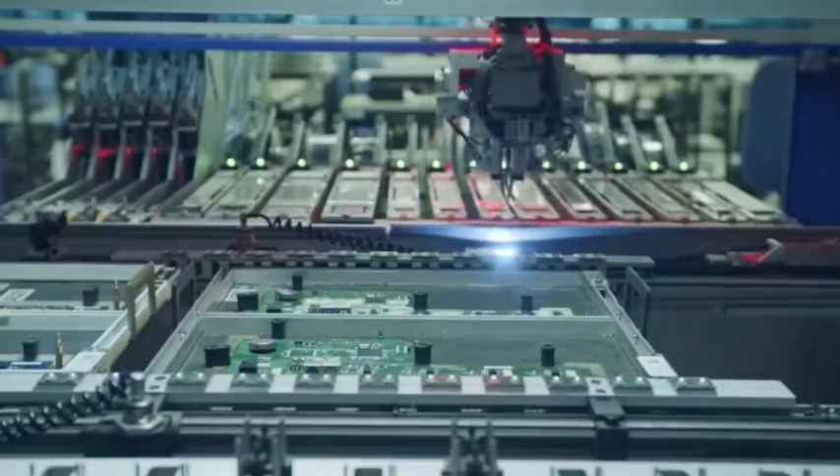In 2024, the global photolithography material market grew against the trend to $4.74 billion, and the demand for EUV photoresist soared by 30%, directly driving the entire market to $5.06 billion in 2025.

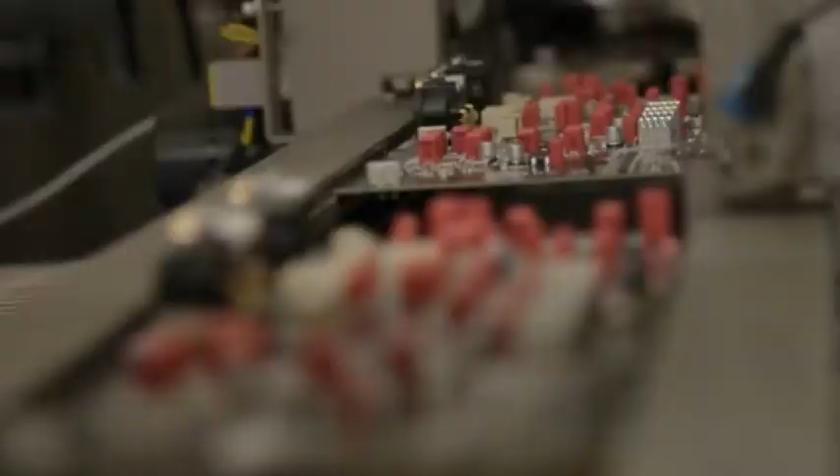TSMC's 3nm chip contains 19 layers of EUV photoresist, and Samsung's 2nm factory burns golden consumables worth millions of dollars every day. The electricity bill of an EUV lithography machine is enough for a small town for a year, but Canon's newly launched Nanoimprint equipment consumes only 1/10 of its energy.

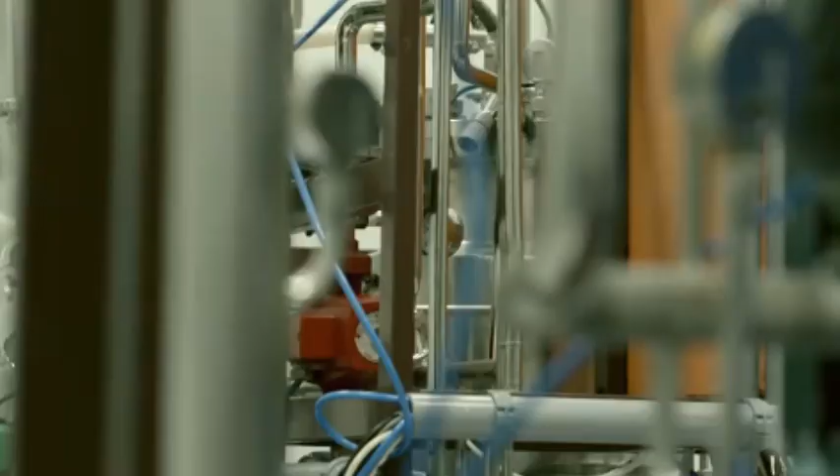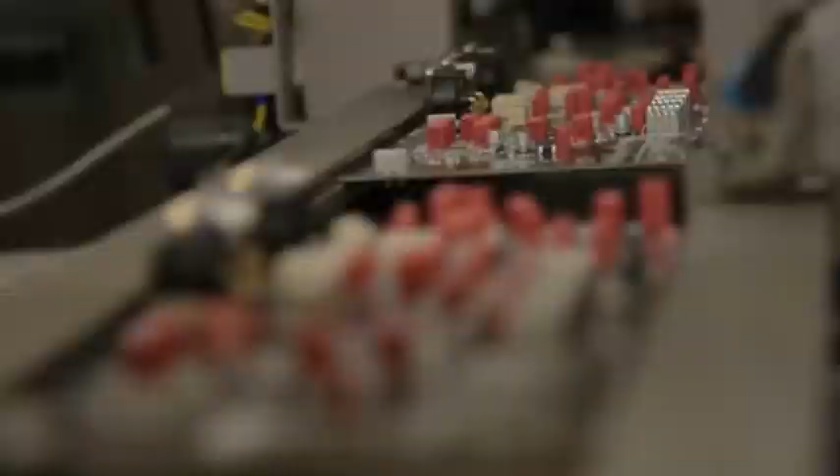In the photolithography material market's $4.74 billion in revenue in 2024, EUV photoresist contributed $520 million, 20% more than in 2023. By 2025, this number will increase by another 30%. In TSMC's 3nm production line, each wafer undergoes 19 EUV lithography steps, nearly 4 times more than the 7nm era. Samsung's 2nm factory is even more exaggerated, and the number of EUV lithography layers is expected to exceed 25.

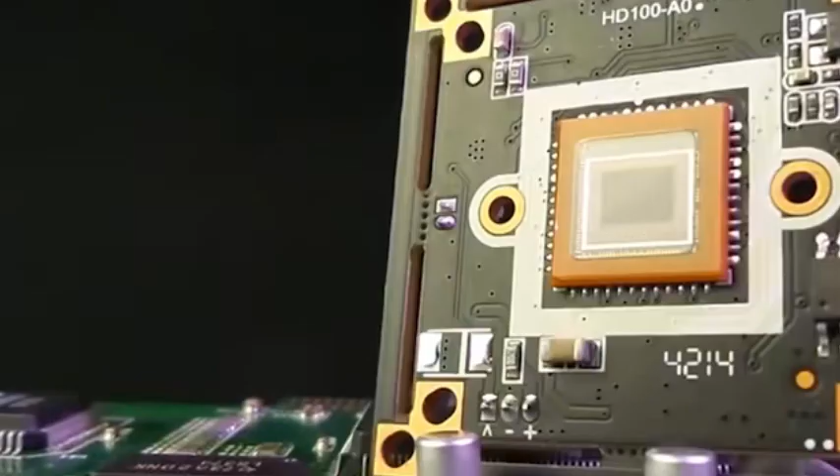Japan's JSR company monopolizes 45% of the global EUV photoresist market. There are more than 50 nano-level additive formulas hidden in their laboratory. It takes 10 years to develop a new formula.

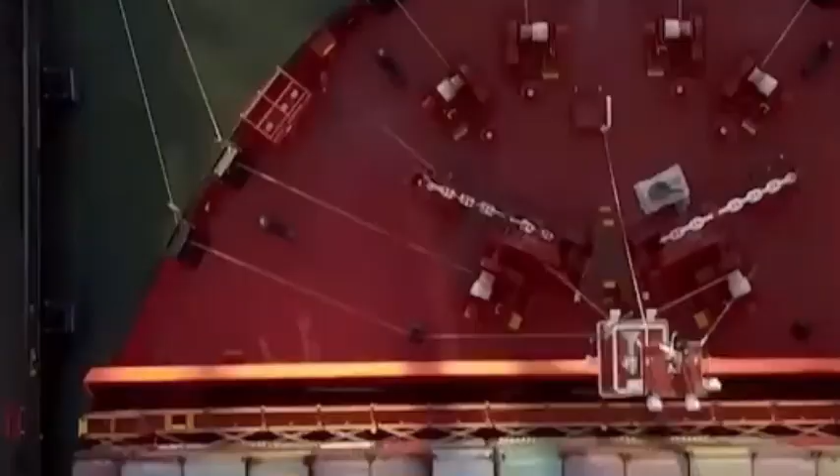Lam Research's dry photoresist has just passed the certification of the Belgian Microelectronics Research Center and can carve 28 billion transistors on a chip the size of a fingernail. This technology uses gas instead of liquid to reduce the photoresist defect rate from 200 parts per million to 80 parts per million.

Canon's Nanoimprint equipment occupies only 1/3 of the space of the EUV lithography machine, and the power consumption is reduced by 90%, but the precision of the 14nm circuits carved out is not inferior to EUV.

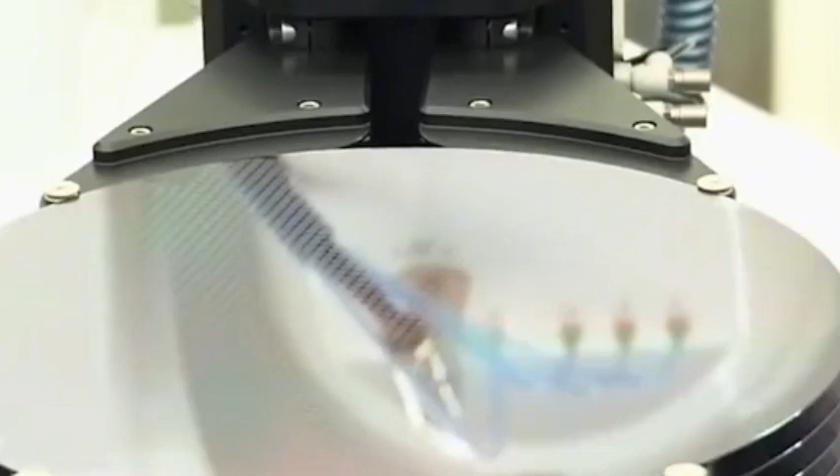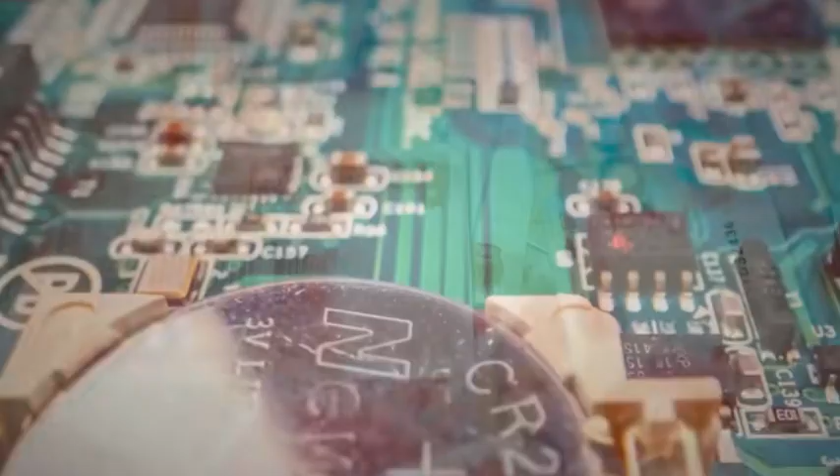The U.S. CHIPS Act has invested $52 billion, requiring local chip factories to use more than 30% US-made photoresists. Japan's JSR urgently built a new factory in South Korea to increase EUV photoresist production capacity by 50%.

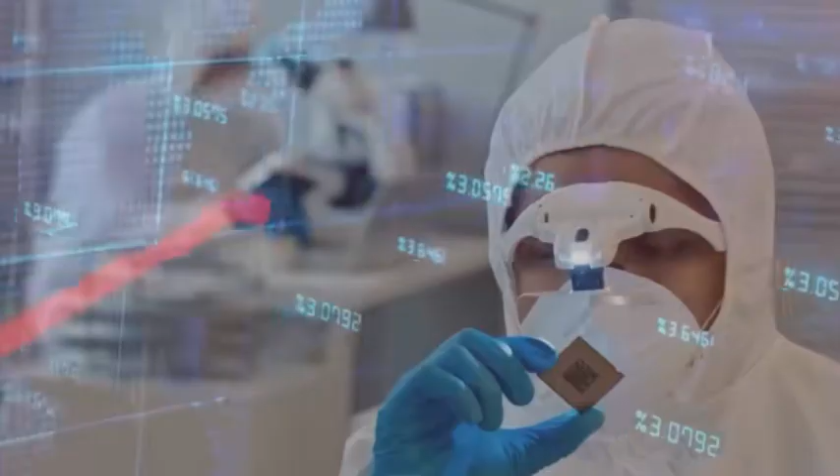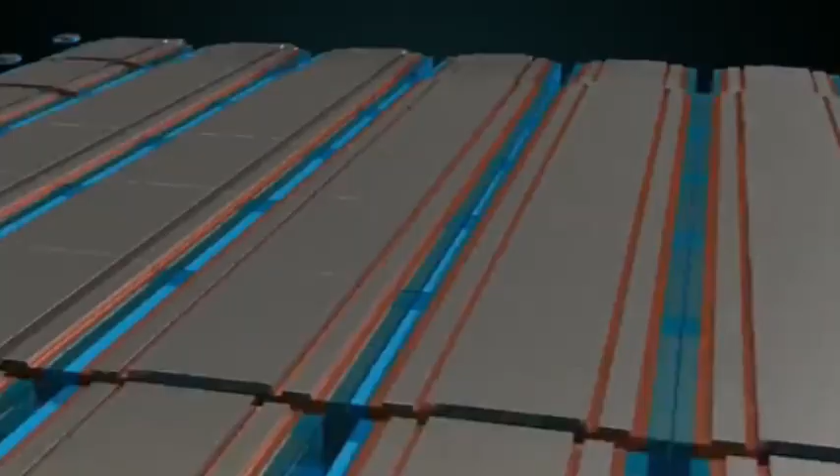China's Nanjing Optoelectronics KrF photoresist has just passed SMIC's verification and will sell 400 tons in 2023, but the price per ton is 15% lower than that of Japanese products. On SMIC's production line, the yield rate of domestic KrF photoresist has reached 98%, but EUV photoresist is still in the laboratory stage. An engineer from a domestic photoresist company revealed that the EUV samples they made can barely be used at the 28nm node, but at 14nm, the pattern loss rate is 20% higher than that of Japanese products.

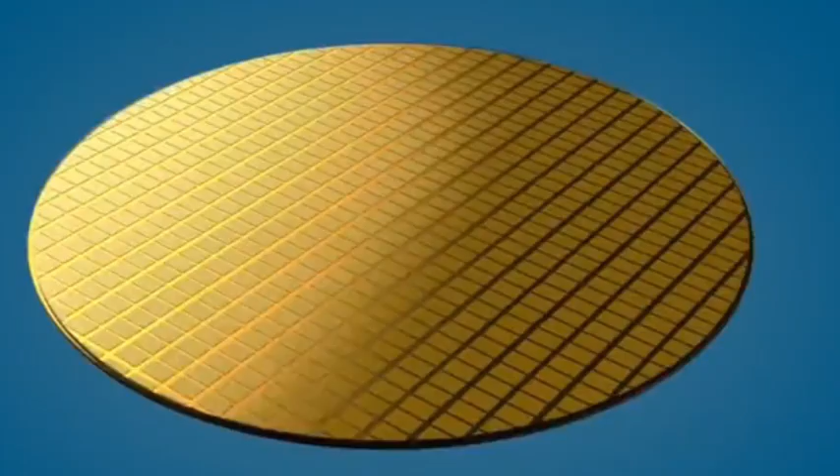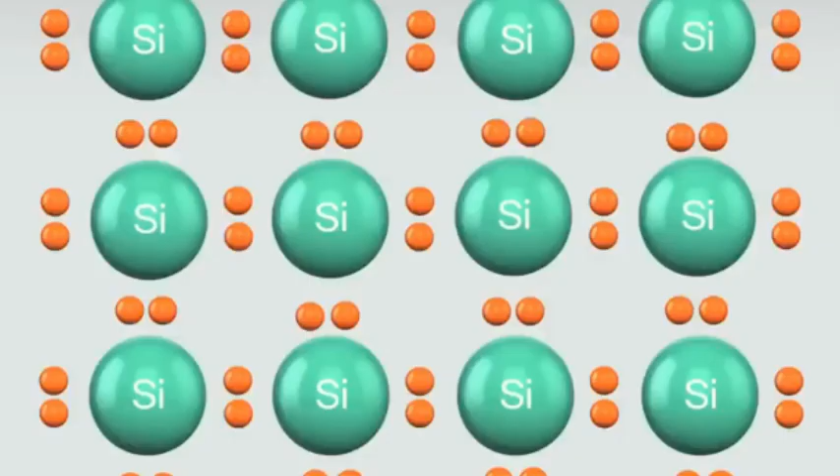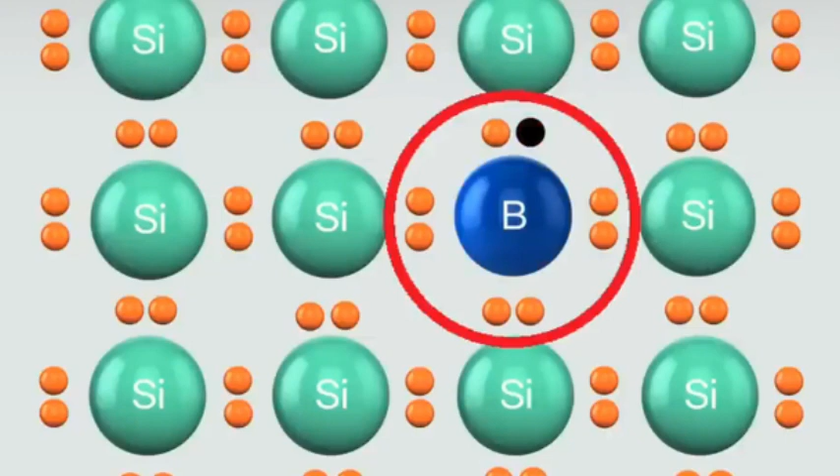TSMC's CoWoS packaging technology used in NVIDIA's H100 GPU requires photoresist to achieve 99.999% pattern integrity at a 2-micron spacing. This is equivalent to drawing a full circuit on A4 paper with a brush, and not a single stroke can be wrong. In order to meet the standard, photoresist companies upgraded their testing equipment to 0.1 nanometer accuracy, which is 100 times smaller than the new coronavirus.

IBM used AI algorithms to cut 70% of the time for photoresist research and development. In the past, it took 5,000 attempts to adjust a formula, but now the machine learning model can lock the best combination after running for 3 days. The EUV lithography machine of ASML in the Netherlands consumes 3,000 liters of ultra-pure water every day, but Canon's nano-imprinting equipment does not even need a water cooling system.

In 2023, TSMC purchased 18 high-NA EUV lithography machines, and the price of each machine rose to $380 million, enough to buy 12 Airbus A320 aircraft. According to the financial report of Japan's Shin-Etsu Chemical, the gross profit margin of photoresist will reach 58% in 2023, which is more profitable than selling iPhone chips.

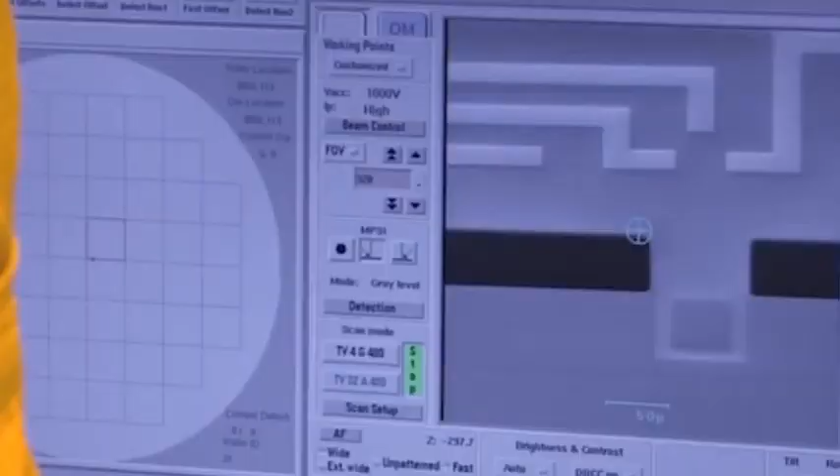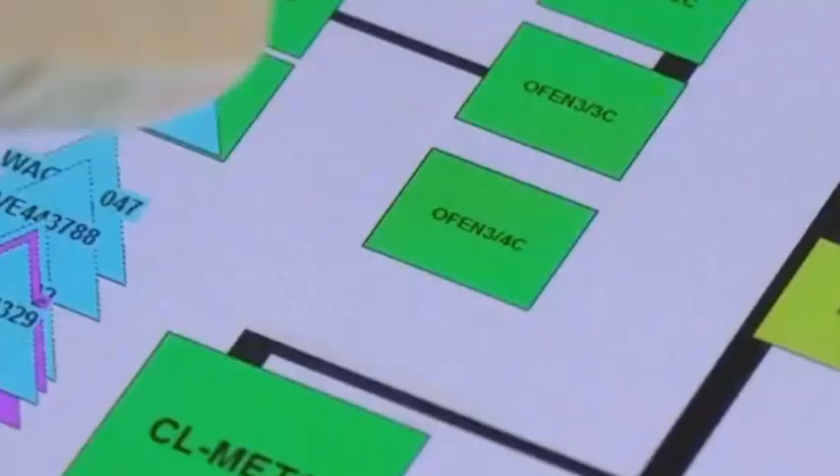However, in the financial reports of Chinese companies, the photoresist business is generally in the red. Shanghai Xinyang's photoresist revenue in 2023 was $230 million, but R&D investment burned $310 million. The mask cost of TSMC's 3 nanometer chip exceeded $20 million, of which photoresist accounted for 35%. If Japanese EUV photoresist is used, the cost of each wafer will increase by $200, but if a substitute is used, a 1% drop in yield will result in an additional loss of $500.

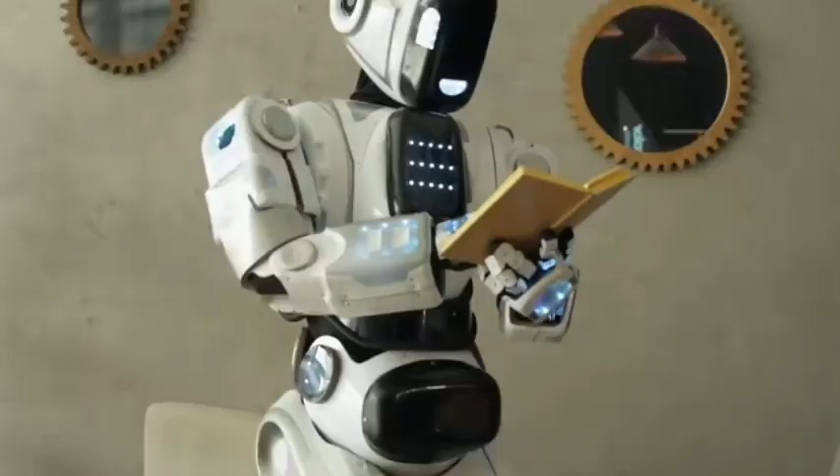In the global photoresist patent library, Japanese companies account for 73% of EUV-related patents. China's EUV patent applications in 2023 have soared by 80%, but 90% are concentrated in the packaging field. Despite significant progress, China's semiconductor industry still faces multiple challenges.

In the field of key equipment such as EUV lithography machines, the situation of more than 90% dependence on imports has not changed fundamentally. The 0.55 numerical aperture technology of ASML's latest high-NA EUV lithography machine pushes the process to below 2 nanometers, which is still an area where domestic equipment urgently needs to break through.

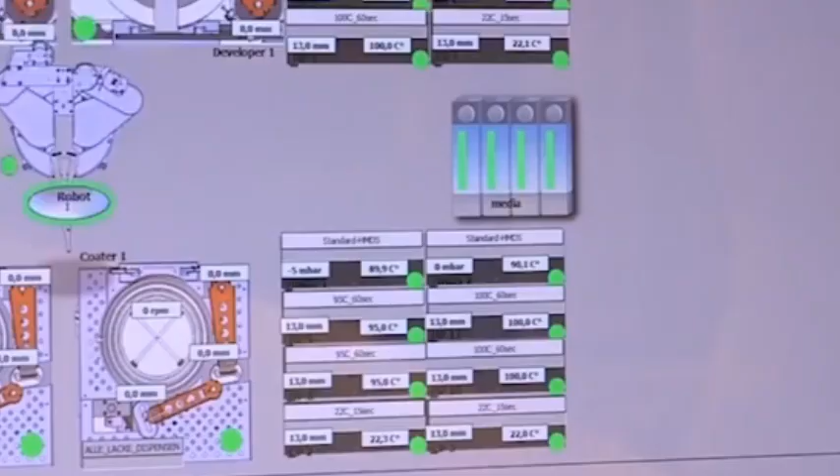The bottleneck on the material side is also prominent. The localization rate of 12-inch silicon wafers is only 10%, and the category coverage rate of photoresists is less than 40%. These invisible shortcomings restrict the overall upgrading of the industry. But there is a turning point in the crisis. The US technology blockade unexpectedly gave birth to an innovative ecology with Chinese characteristics.

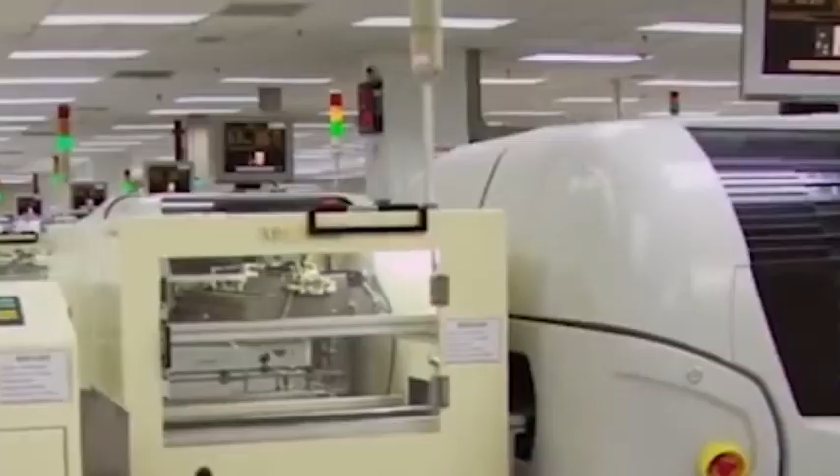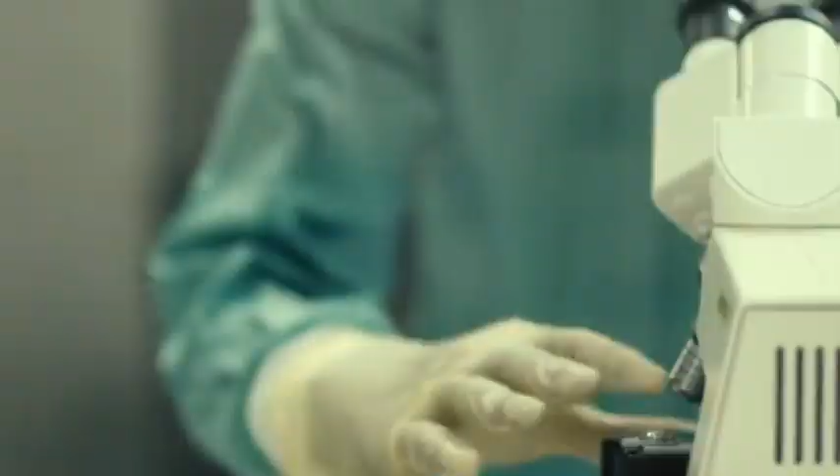Huawei's Tashan plan has gathered more than 2,000 supply chain companies to build a complete replacement system from EDA tools to packaging and testing. The chiplet technology developed by the Institute of Microelectronics of the Chinese Academy of Sciences modularizes chips of different process nodes through heterogeneous integration, and achieves equivalent 5 nanometer performance on a 14 nanometer platform. This system-level innovation is rewriting the rules of the game.

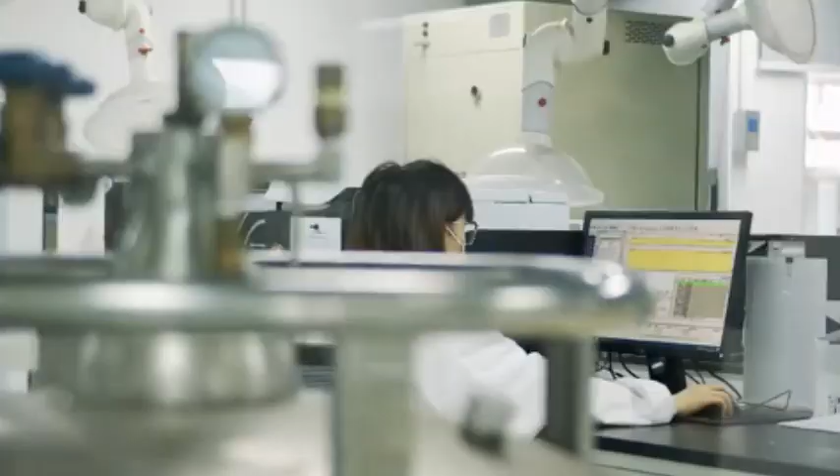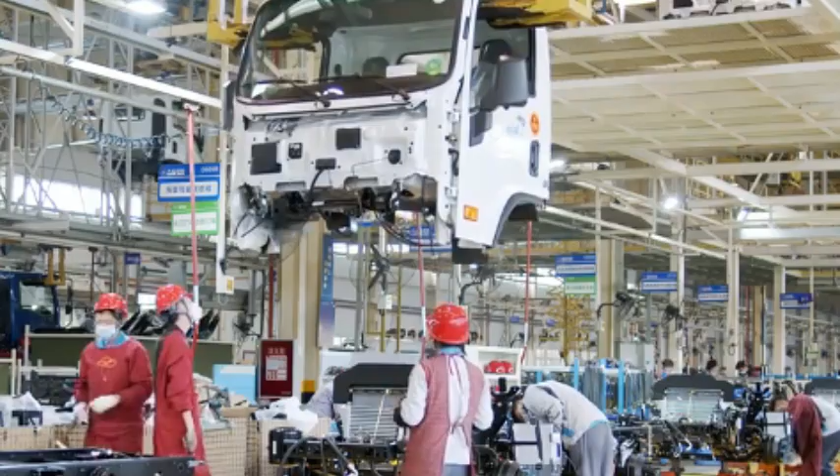In 2025, China's patents in the field of RISC-V architecture chips accounted for 38% of the world, laying the foundation for building an independent technology ecosystem. From microns to nanometers, from two-dimensional to three-dimensional, the evolution of China's semiconductor industry confirms a truth: technological blockades cannot lock innovative thinking, and process gaps cannot stop system breakthroughs.